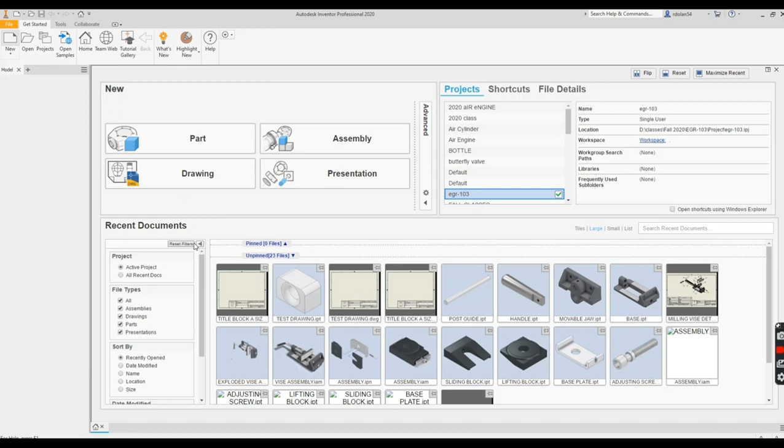We're going to take a look at drawing the exercise files from this chapter. So that is on your PDF, and I'm going to start new, of course, and this is in inches, so make sure I'm in English and standard, and I'll pick create.

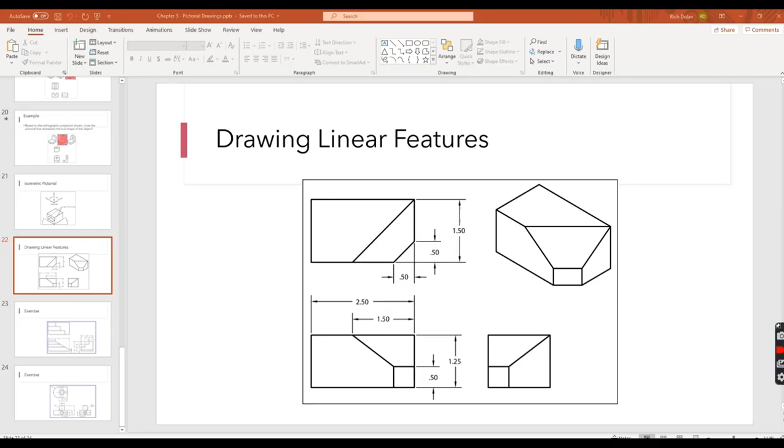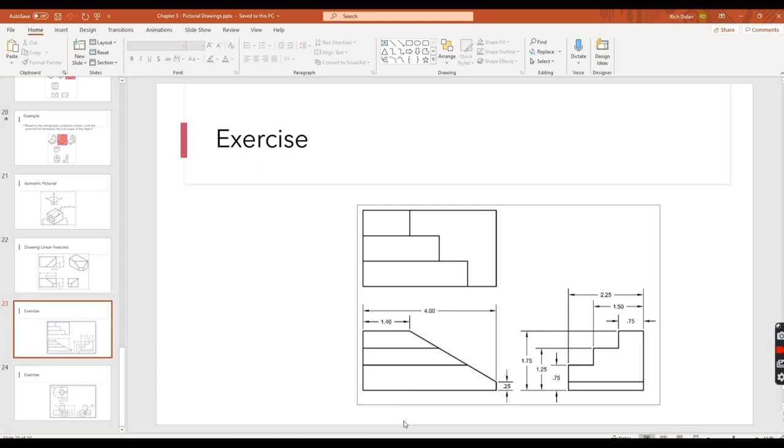Now the drawing that we're going to be looking at is this one right here. Okay, so I have to decide where I'm going to start drawing. I think the best way to start this, I'm going to start here and draw the right hand side first. Okay, so that's the first one I'm going to draw. So I'm going to go in here to new sketch, and I'm going to go to the right hand side, which is the YZ plane.

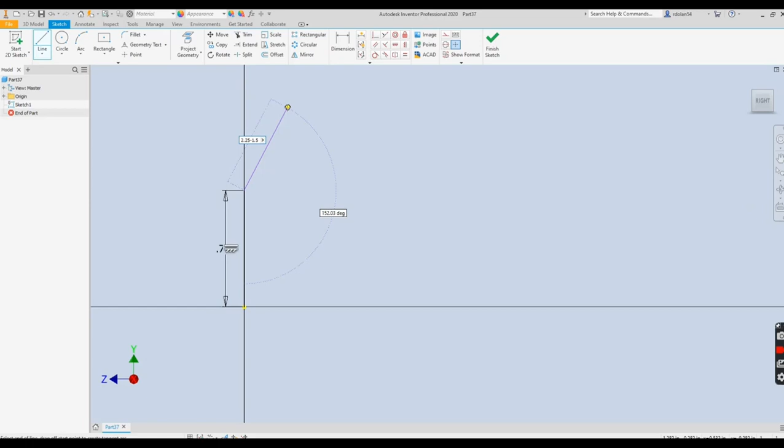Okay, alright, I'm going to start drawing my steps there. I'm going to start at the origin. I'm going to go straight up, and I'm going to go 0.75. And then I'm going to go back. Now that is 2.25 minus 1.5. So I'm going to type that in. 2.25 minus 1.5. Okay, now I got to make sure that my line is straight. Mine was crooked there, so try this again. 2.25 minus 1.5 gives me that line there.

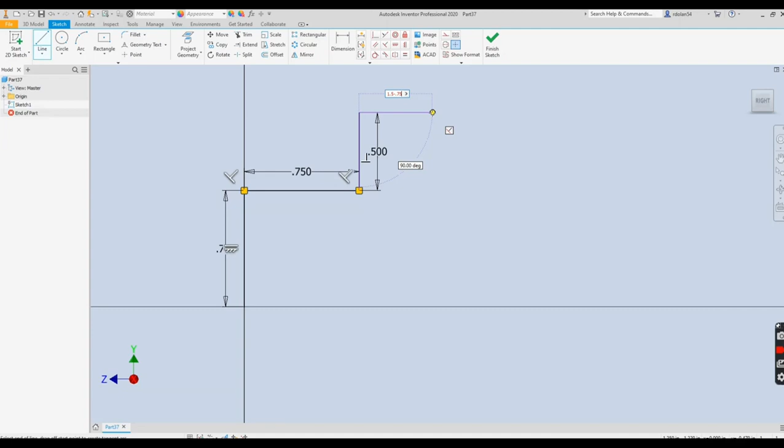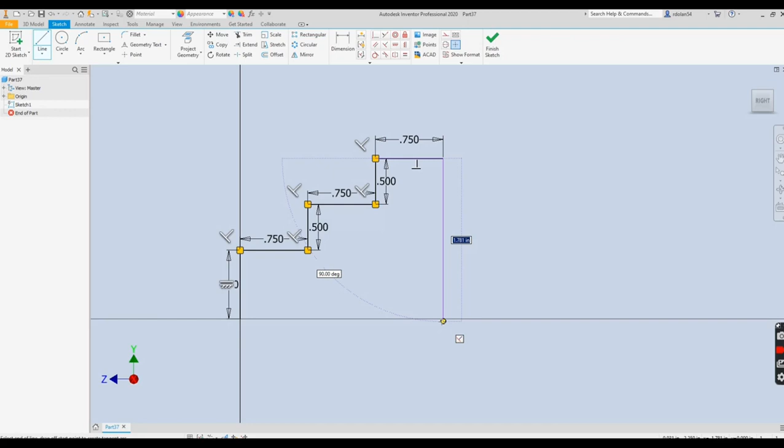I'm going to go straight up again, and I'm going to go, we got 1.25 minus 0.75. I'm going to go back this way, and that is going to be 1.5 minus 0.75. And I'm going to go straight up, and that is going to be 1.75 minus 1.25. Okay, I'm going to go back this way, and that is 0.75. Come straight down 90 degrees till I get to this point. If I want, I can make sure I get that line right there. Make sure I'm 90 degrees right there, and bring it right to this edge right here.

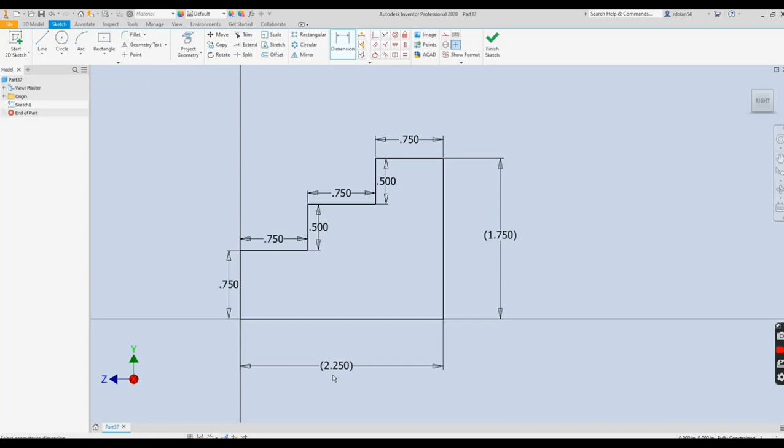Okay, I want to check some of my dimensions, so I go here. That is 1.75. If I go to do that, it will say it's going to over constrain it. So I can say accept. Okay, and what it's going to do is just put that there as a reference so I know that I'm doing the right thing. Okay, I can also do the same thing here, and that is 2.25, and I'll accept that. Okay, these dimensions won't hurt anything, just won't be used.

And I'll pick finish. Now what I want to do is now I want to extrude it. Okay, and I'm going to extrude that. Pick extrude, and I'm going to go 4 inches. Okay, so I have my right hand side done.

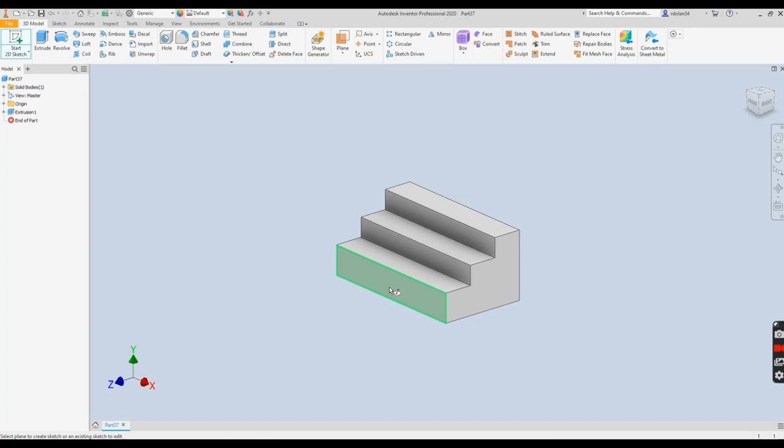Okay, so now we're going to go to the front view, and if I again look at the drawing, here is the front view. So what I need to do is I need to go over 1.4, 0.25, connect the two. Alright, so I'm going to start a new sketch. I'm going to start on the front view. Okay, and I'm going to draw a line from this endpoint over here, which is 1.4. And I hit enter. I draw a line here that goes up 0.25, and I'll connect the two of them.

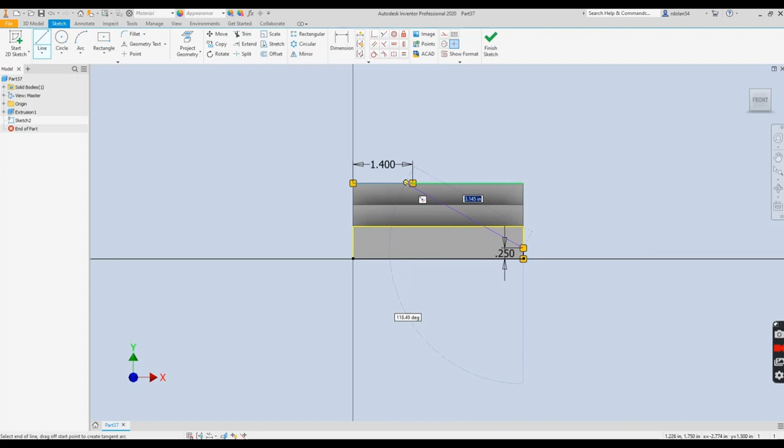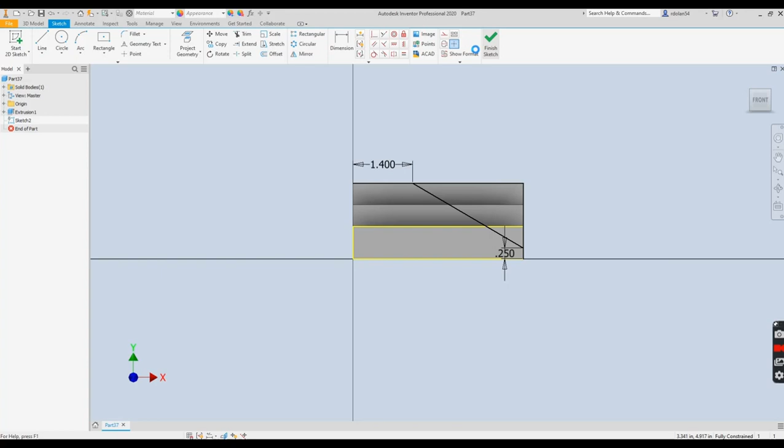Okay, now I'm not going to extrude this part. This is the part that's going to be left. I'm going to extrude this part here, so I need to finish those lines. So I'm going to go here to here to here and pick OK. Alright, I'm going to finish my sketch. Okay, so now you see I have this spot here that I'm going to extrude.

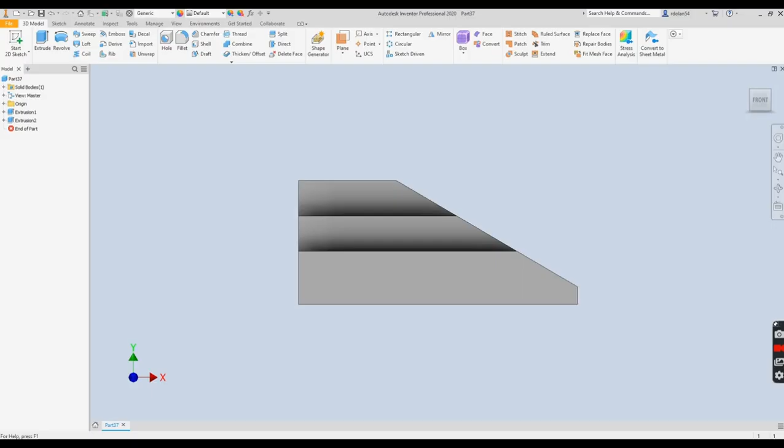I'm going to pick extrude. I'm going to pick here. Now notice it didn't pick this bottom part, so I have to pick that as well. I want to cut it, and I want to cut it all the way through. And I'm going to pick OK, and now I have my views. If I take a look at my front view, okay, that looks exactly right there. Here's my top view, which will look like that. Looks pretty good. And then my right side view will look like this. Okay, so it all looks pretty good.

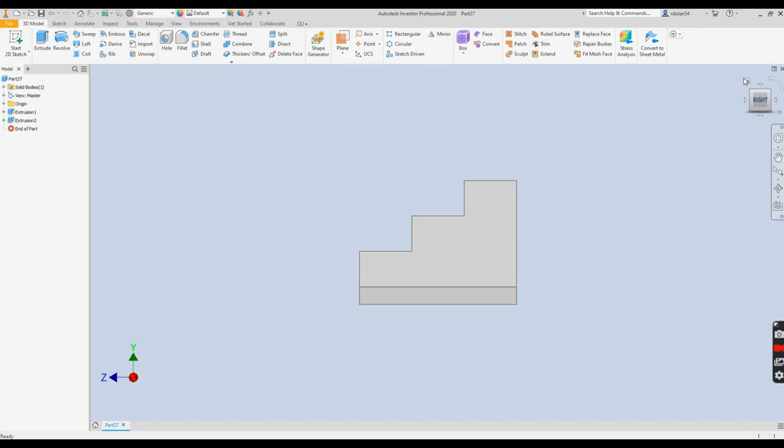Okay, I'm going to go back to my isometric view, and I'm going to save this. I'm going to File, Save As. I want to look where I want to put it, and I'm just going to call this Example 1.

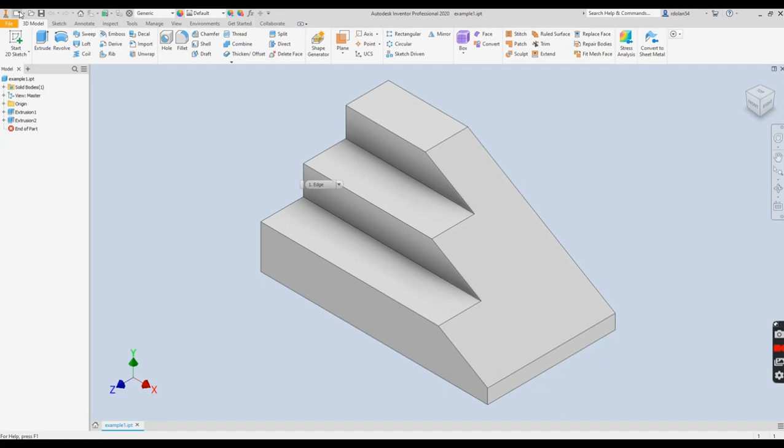Okay, now what I want to do is I want to slap it on a piece of paper. Alright, so I'm going to open up the templates that we made before. So I'm going to open, and this is an A size inches. I'm going to pick open. Okay, so here is my A size inches.

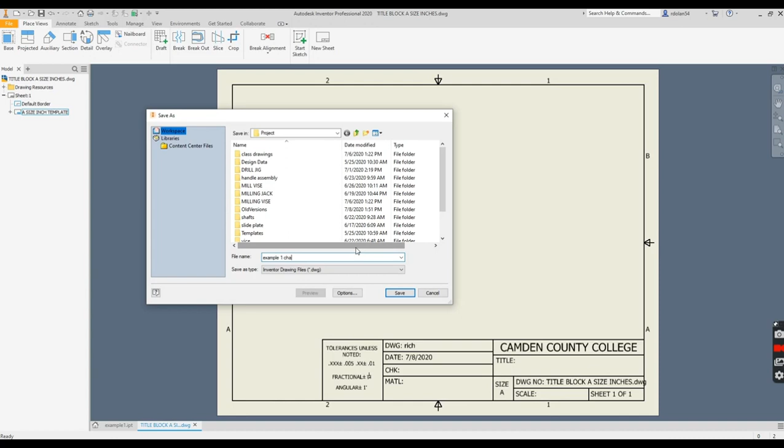Now what I want to do first is I want to go File, Save As. Okay, and I want to do this right away, and I'm going to call this Example 1 Chapter 3, so I can remember where it's at. I'm going to pick Save.

Okay, now when we go to put a drawing on a piece of paper, again, you'll notice that we have a different setup up here because we are in a drawing instead of a part. So I'm going to pick base, and the base is going to pick where we want to start. It's always going to start with what it thinks is the front view. If it's not the part I want, I can go here to open existing drawings and find it, but this is the one we want.

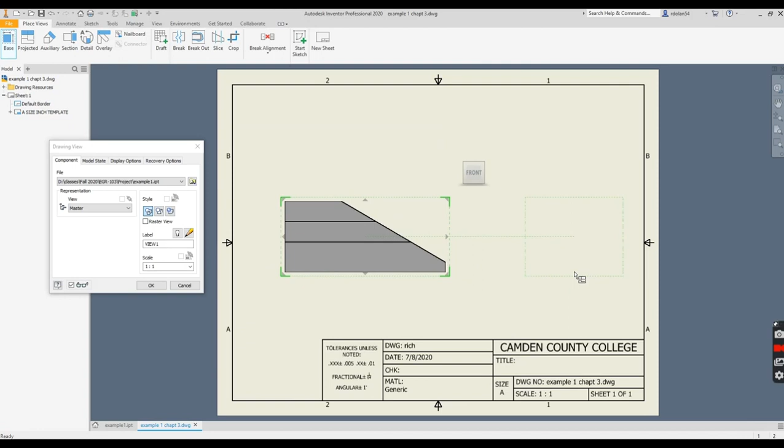I can slide it over here. Now to make the right side view, all I do is drag it over here to this side. Drag it up here to that side. I'm going to have to move them around a little bit. So I can move this down, and then move that up a little bit. And all I do is pick OK. Alright, so now I have my drawing there.

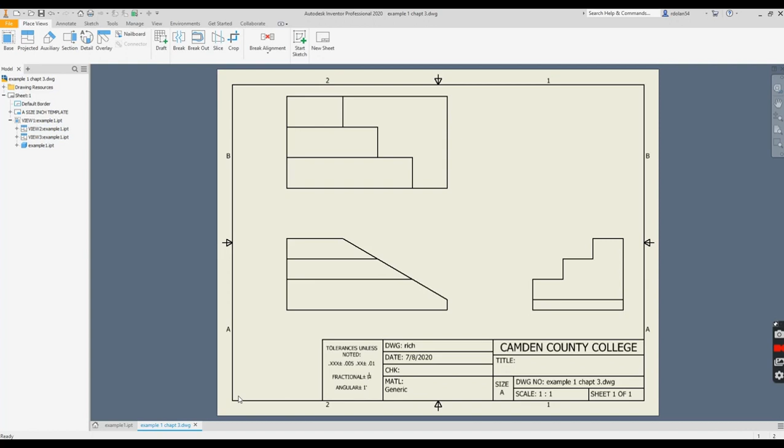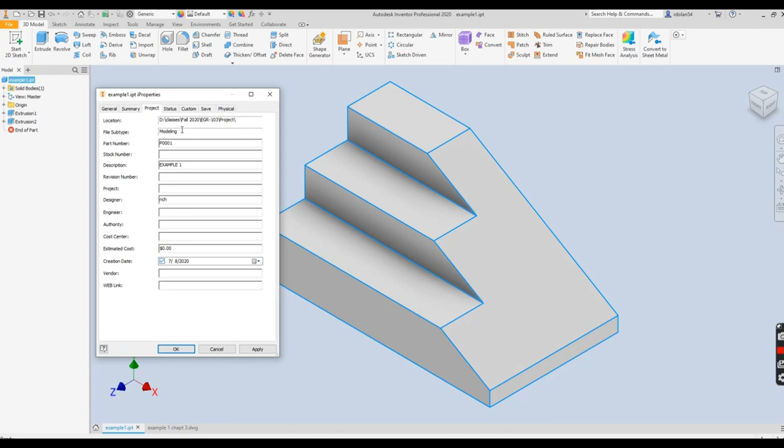In order to fill in the block, I need to fix some of the stuff here. So I'm going to go to iProperties, the summary, and this is called Example 1. I'm going to put my caps lock on. Make sure that I put my caps lock on. Now I can put my title, Example 1. Make sure my name is right there. The project, if I had a part number, P0001, whatever it is, description, Example 1. I can put any of this other information that I want, but that's all I want.

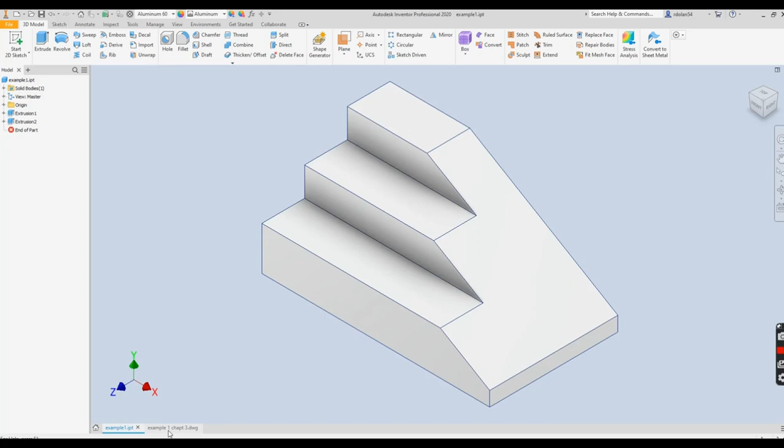So I'm going to go to physical, and let's say that this is aluminum. So make it 6061 aluminum, and we'll pick OK. You notice that the color has changed because it's going to pick the color of aluminum. And I'll save that. Go back to my drawing. Now notice my name's not fixed. The date is right, the aluminum. The title and the drawing number are okay, so I need to go up here to

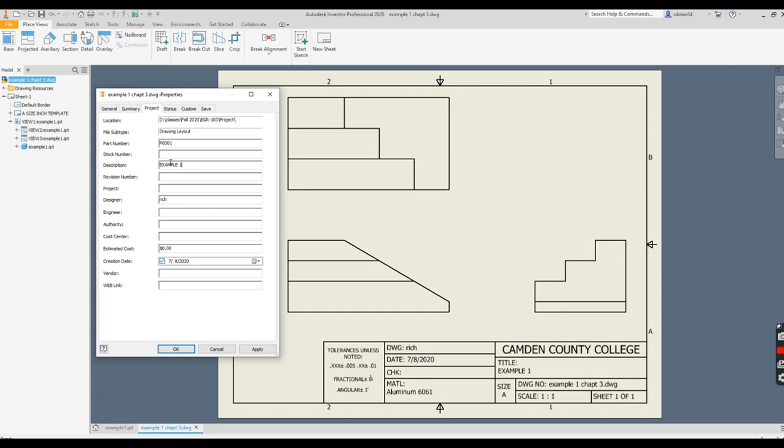iProperties. Summary, the title's okay, but I can put it here if I want. Example 1. The author, this time I'm going to change it to me. All this is okay. I can change this to what it is, part 0001, description, Example 1. Everything else should be okay. And I pick OK. Now I have my drawing. I have my 3 views.

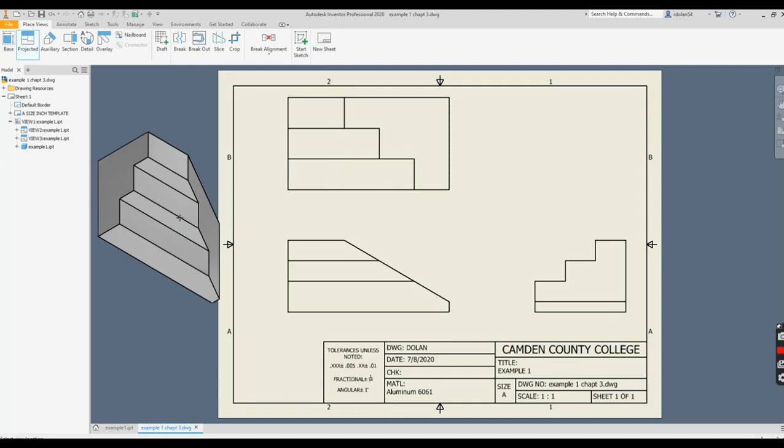Now I want to make sure that I have an isometric view. What I can do is go up here and pick projected. Now I can pick whatever view I want. So if I pick this one, I can make that isometric view anywhere I want. If I go in here, pick this one, a little strange one, but I can pick those. If I wanted this one, I could pick these. So depending on which view I want to look at. I kind of like this one. That shows it nice. And I'm just going to slap that right there, and I'll pick Create.

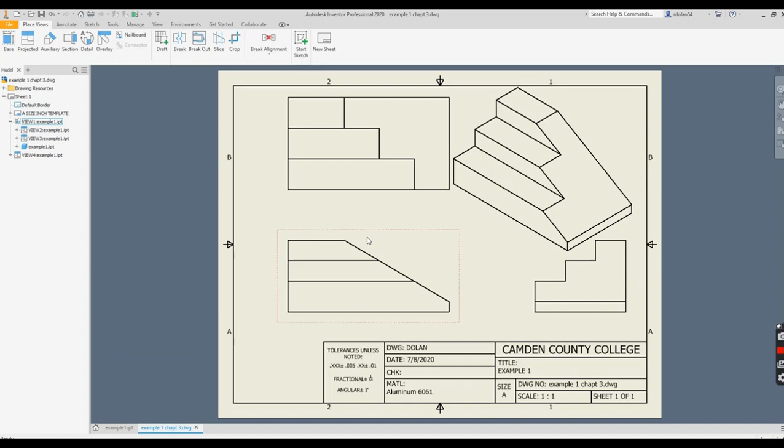Excuse me. Now one thing, I'm going to move these out of the way a little bit. Maybe just a little bit down. Notice that this view, when I move it down, this one moves with it. When I move it over, this one moves with it. So that's not so bad. Now, if I were putting dimensions on, that would not be great, but it'll be okay.

Now, if I double click on this, I get my drawing view. Here we'll see the style. Now I can put hidden lines in there if I want. So if I go here where it says style, hidden lines, pick OK and you'll see any hidden lines. Now it's not normal for us to put hidden lines in an isometric. I can also pick right here, that's what the default was, no hidden lines, and then I go here and that's shaded. Now, I kind of like shaded. Of course I didn't pick it, but it kind of looks nice shaded.

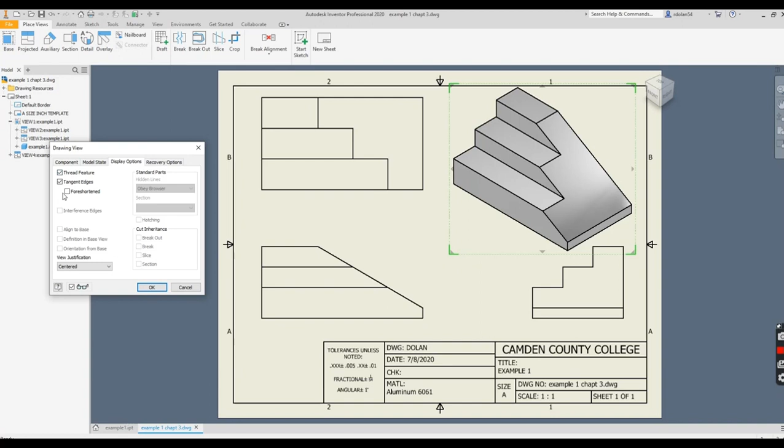Also on there, I have things like display options if I'm showing any threads, and tangent lines and things like that. Model state we don't have to worry about, and I can just pick OK. Now I would just save this. Again, make sure that you've renamed it from your template file, and I pick save. And that is our first example.

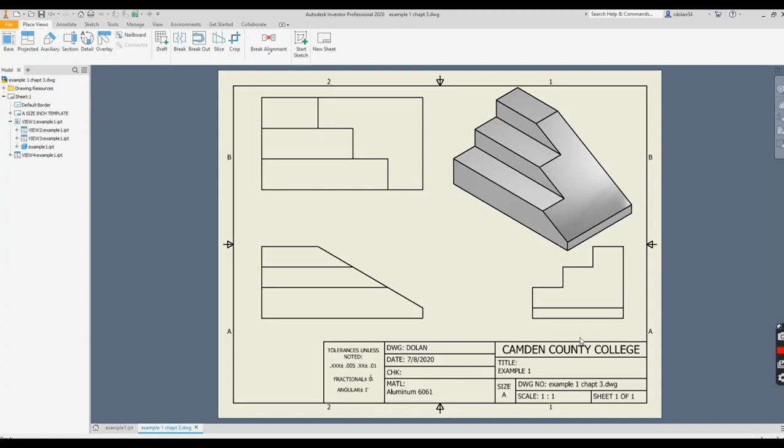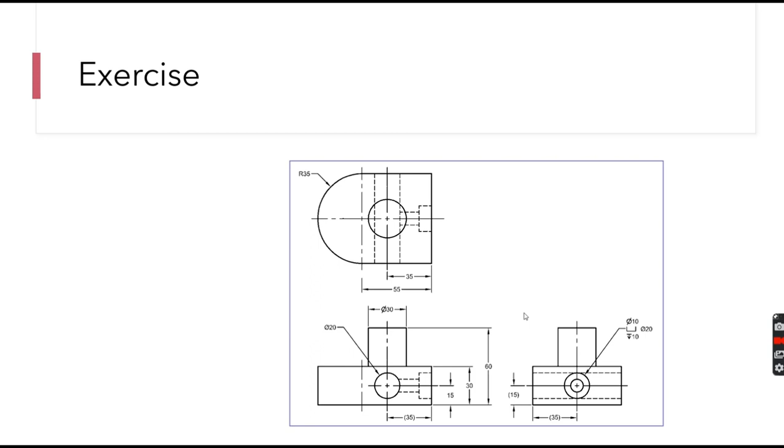Let's take a look at our second example. Here it is. I'm going to draw this one. Again, I'm going to start looking at what I want to draw first. Since I have this radius here, I'll probably start with the top view. Another thing I want you to know is that this is 35, 55; unless it's a really big piece in inches, this more than likely is a millimeter drawing. So let's go back to here, and we're going to pick open, and this time I'm going to pick my millimeter title block.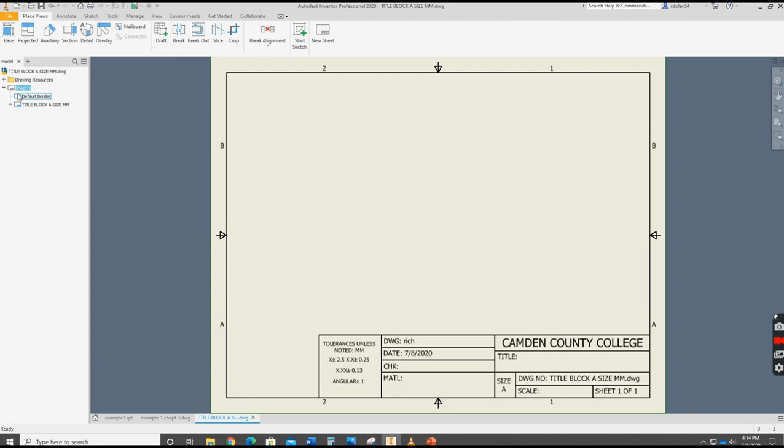Okay. Now for some reason, and this might happen to you, it's not showing up there, and I'm going to go here and zoom all so it shows up. It's fine. Alright, now I'm going to make this a B-size drawing, just because I want to. So I'm going to right click on sheet, go to edit sheet, make this a B-size, and I pick OK. So that's where I'm going to put it.

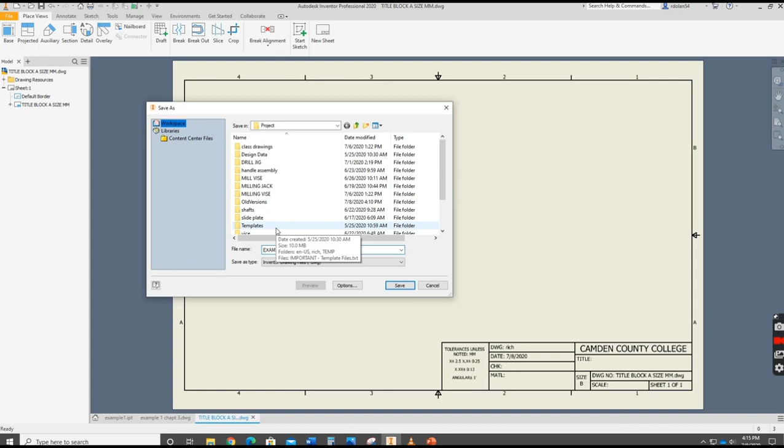I'm going to go to file, save as, and this is going to be example 2 chapter 3. Okay, now I do need to draw the drawing first, so I'm going to go to, that's why that does that, it's my mouse. Okay, I'm going to go to open, nope, I'm going to cancel that. I'm going to go to new. I'm going to go to metric, and I'm going to make this a standard millimeter drawing.

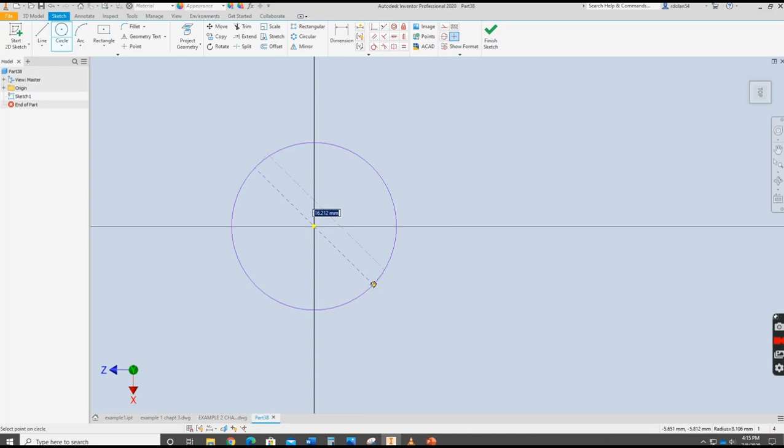Okay, again I'm going to start the sketch, and I said I want to start at the top view. So I'm going to start by drawing a circle. I'll put it at the origin, and notice that it is 35 millimeters, and that's the radius. So I can either type in 35 times, whoops. Okay, so now I got 335. I'm going to go to dimension. I'm going to double click on that. I'm going to change this to 35 times 2. Just in case that happens to you sometimes. So you'll see it's 70.

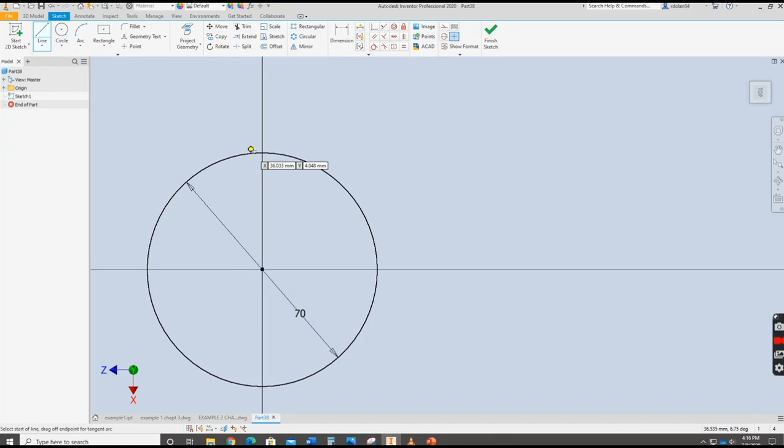Alright, so now you'll see that from here I'll draw a line. Right there, and you'll feel it kind of snap there. And I will draw there, and notice it is tangent. And from that center to there is 55. I'll go down to here, find the tangent line to that. Right there, you'll see that little dotted line. Come over to here. I'm going to pick OK.

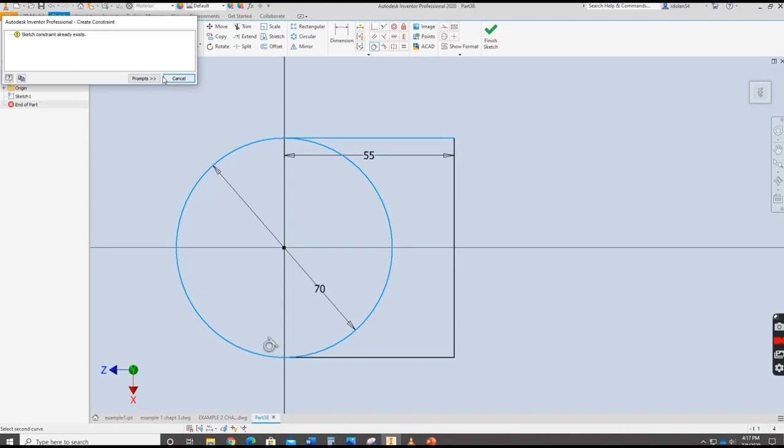Now I want to make sure that that is tangent. I'm going to go tangent here and make sure this line and that line is tangent. Let's try that again. I'm going to make sure that this line and that one is tangent, and this line and that line is tangent. That one already was tangent. We saw that before, so I don't need to put that there. Okay, I'm going to trim this guy up here. Alright, now I'm going to leave that hole, or no I'm not.

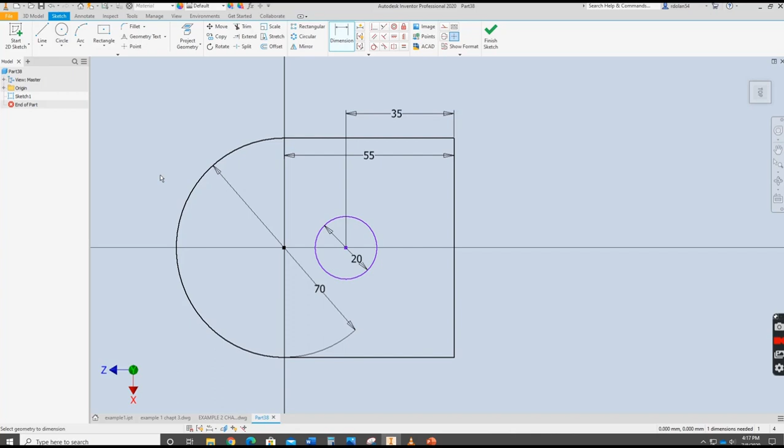I'm going to put that circle here. Now, you'll notice it's not on this center, so I'm just going to move it over to here, somewhere, and I'm going to go up, and that is 20 diameter, so I'm going to type in 20. I'm going to dimension from this spot to here, and that is going to be 35. Okay, now what I wanted to show you, I'm going to finish the sketch.

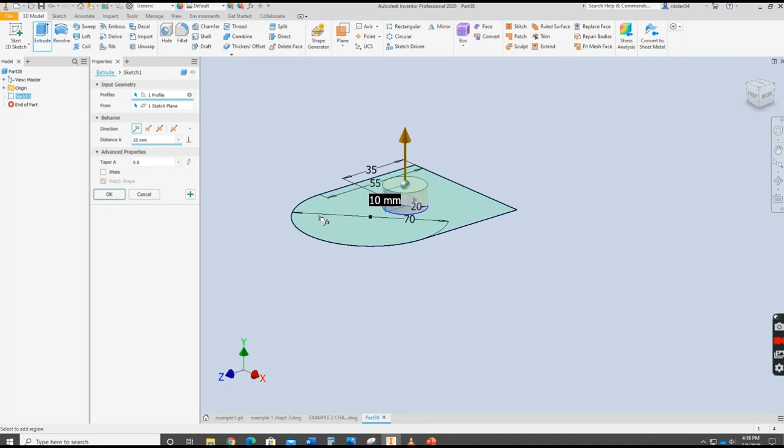Okay, now if I go to extrude this, I can extrude that, and that puts a hole in it. I don't want that, so I'm going to undo that one. Now if I pick this one, well, unfortunately I cannot extrude both of these. So I'm just going to have to extrude that part. If you notice, I paused there a minute. I was not going to draw that circle, but I'm going to show you that you have to create a new sketch to do that.

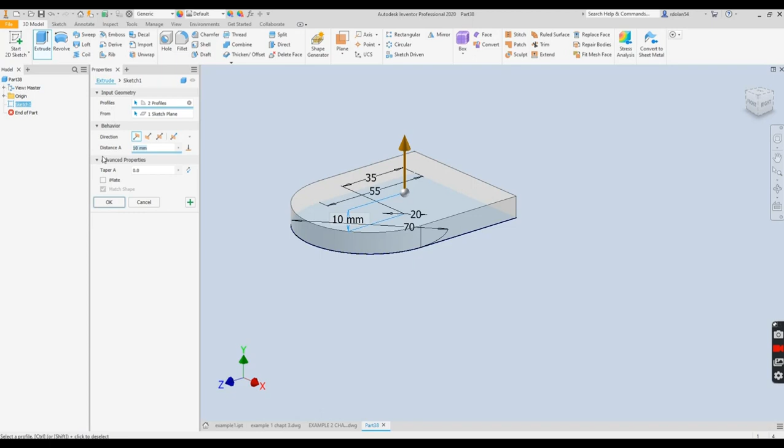Okay, so I had a hard time remembering when I first started drawing in Inventor that if you're extruding things at different depth or height, you have to put them on a different sketch. Okay, so here I'm going to do this one, and this was, what is it, 30. I'm going to type in 30, pick OK.

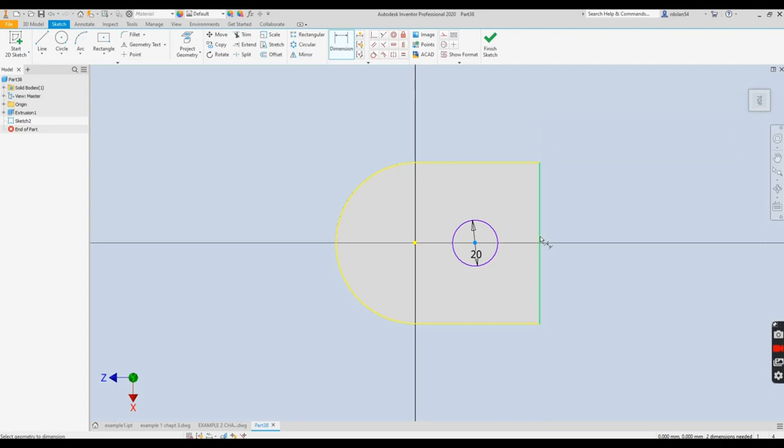Now I can put that boss sticking up there, so I'll go to new sketch, and I need to put it here. Okay, I'll do what I did before. I'll just put a circle here, and I'm going to put this at 20. Then I'll dimension this from here to here, and that is 35. And then I'll finish the sketch. Now I can extrude that.

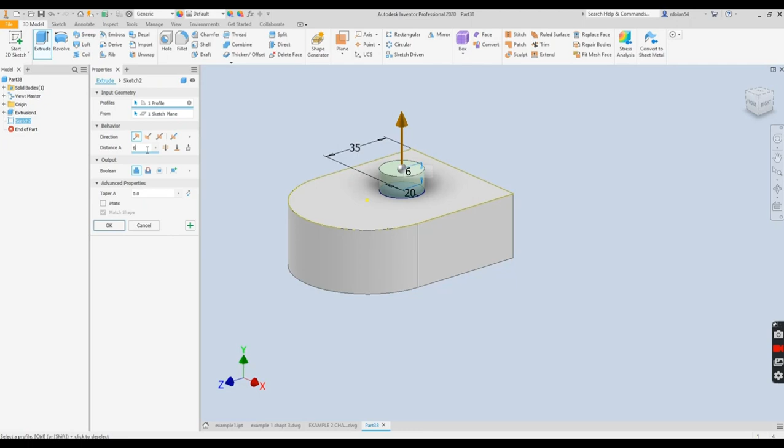I'll pick this one again. If I pick the wrong spot, that's not what I want, I can go here and clear the selection, click there. Now I want to see how far that is. Okay, now that is, according to the drawing, 60 from the bottom. And the thickness of that bottom part is 30, so if I go 60 minus 30, it's kind of a nice feature that you can do any kind of math when it's asking for a distance.

You can use brackets, you can use multiply, divide. Okay, it's pretty handy. I'm going to pick OK.

So now I have this. Now what I have to do is I have a hole to put in the back here and a hole to put on the side.

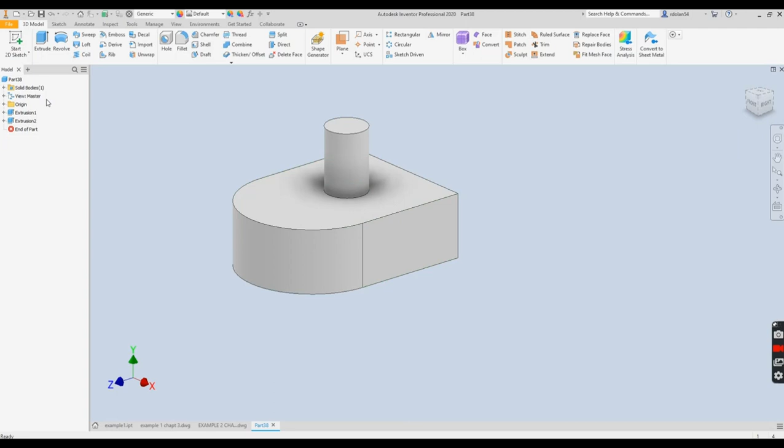Okay, for example, let's say for this hole on this side. I'm going to create a new sketch and put it on that surface. I'm going to draw a circle, pick a spot, and that circle is 20. I just noticed a problem with that boss sticking up there. I made that 20 because I read the wrong dimension.

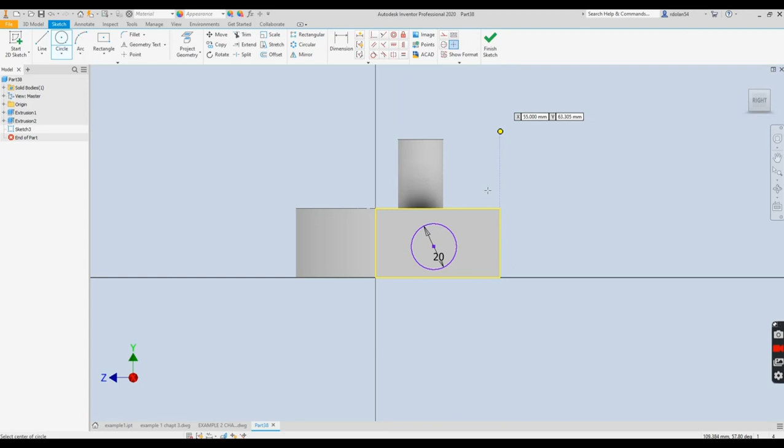It should be 30, so we're going to look at how to fix that in a minute. Now I want to go to dimension, and from here to here is 15, and from here to that center line is 35. So now I can finish the sketch.

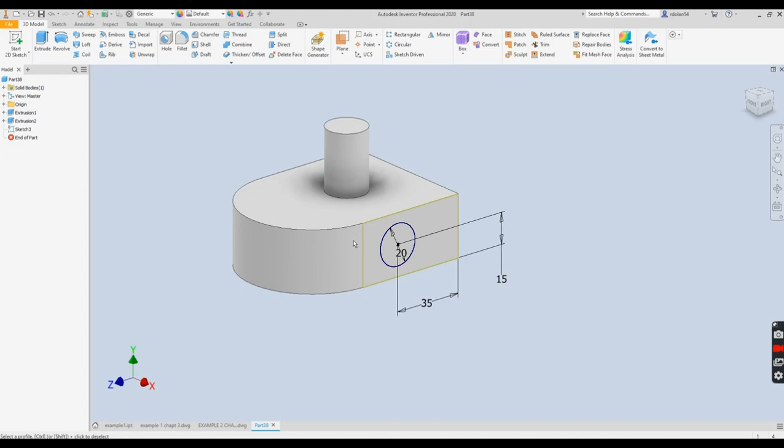I can extrude that through. I want to cut it because it's a hole and I want to go all the way through, and I'll pick OK. Now again, I said that I drew this the wrong size.

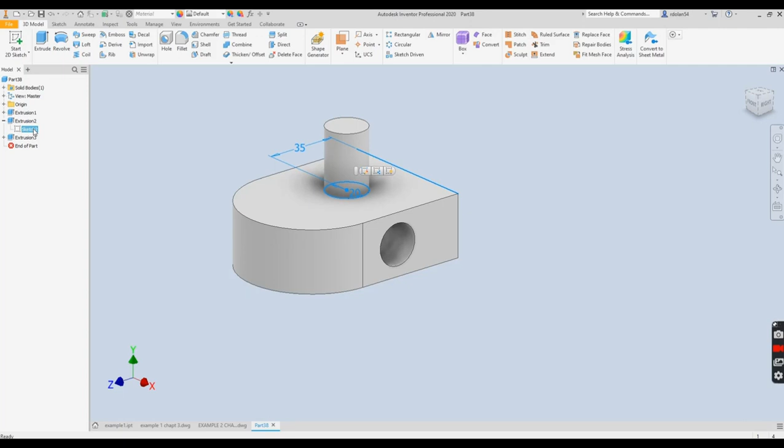So what I have to do is find out where I did that. That was under extrusion 2. If I open extrusion 2, here is the sketch that I made. I'm going to right click on it and pick edit sketch.

I'm going to double click on 20 there, and I'm going to change that to 30. Then I pick finish sketch, and our drawing has been fixed as if by magic.

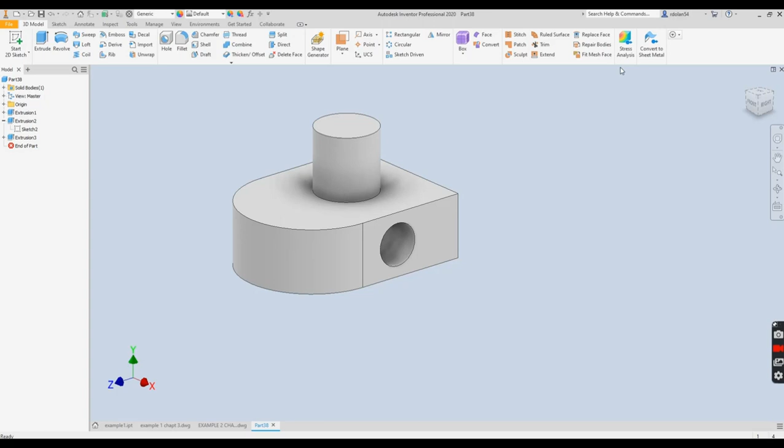Really nice feature. Now I want to put a counter bore in there, on the back side here. So what I want to do is hold my shift button down, then hold my mouse button in the middle down, and while I'm holding both of them, I can bring this around this way.

Okay, and then if I wanted to, I could make a new sketch here, but we're going to use the hole command.

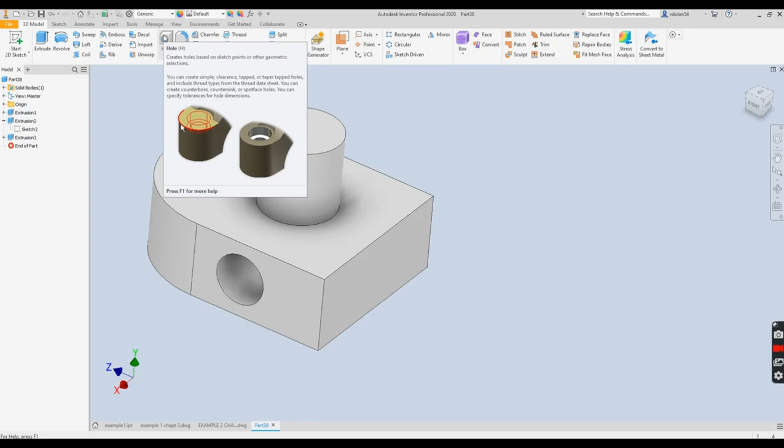Now the nice thing about the hole command is it lets us do things like countersinks and counterbores and threads. It's really, really, really nice, and we can do that while we're in our 3D view.

So I need to be able to see this face right here. If I want to swing that around a little bit, I can do like before and hold the shift button down, or I can come over here to the orbit command and just make it so I can see it pretty nice. Right click and pick OK.

I'm going to go to hole. When I go to hole, I'll get this, and you'll see that I have different holes, and we'll talk about that in a second. I want to know where I want to put the hole.

Now it doesn't matter. If I put it here, it will automatically put it in the right direction. If I put here, notice it will do it in that direction. So I want it here.

Now the thing is, I want to make it in the right place. It's a little tricky to remember how to do this. So I want to go from this edge, so I just click on this edge and I'll put a dimension there.

Right now that's 37.613. I'm going to change that to 35. Now don't hit enter. That's the tricky part. If you hit enter, you're going to start a new hole.

So then I'm going to come here, and from the bottom, that dimension is 15. Again, do not hit enter. So now here is the type of hole.

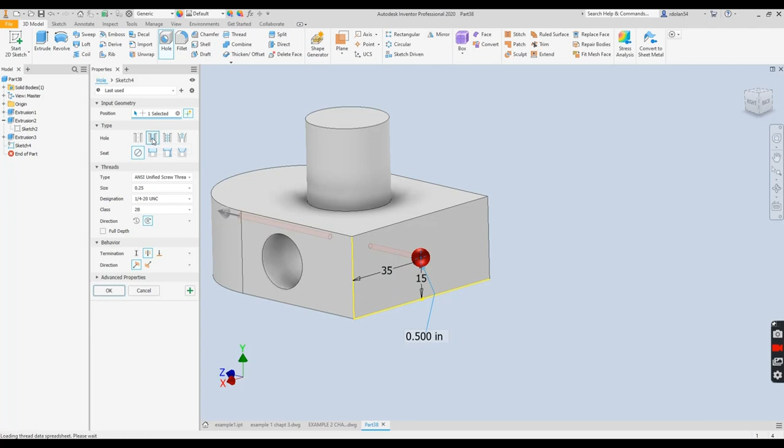I have a simple hole, which is just the hole we're going to use here. Now I have a clearance hole. If I pick clearance hole, it wants to know what kind of screw do I want. So if I were using a flathead machine screw that was a number 10, it would automatically put that in there. Now of course I would pick ISO, and that's an M2, so that would be that.

Or if I wanted a thread, I can pick whatever thread I want. If I wanted a tapered hole, this is a countersink, I can do that. Now this is just a plain hole, so I'm going to go through there.

Now I have different options. I can go a distance, how deep I want it. I can go in the direction that I want to go to. I can go whether it's going to have a flat or a pointed end. Most of the time when you drill a hole, it's going to have a pointed end here, from the drill bit. We'll talk about that when we get there.

Okay, but what I really want to do here is make a simple hole, but with a counter bore. You'll see there's two lines - that is called a counter bore. It's so we can put a screw or a bolt in there so the head doesn't stick up. Now I need the dimensions of it.

Now if you notice on our drawing, it says 10 diameter, and it says 20 with a weird sign, and then it has a down arrow with 10. What that means is this little hole here has a diameter of 10, so I'm going to make that 10 millimeters.

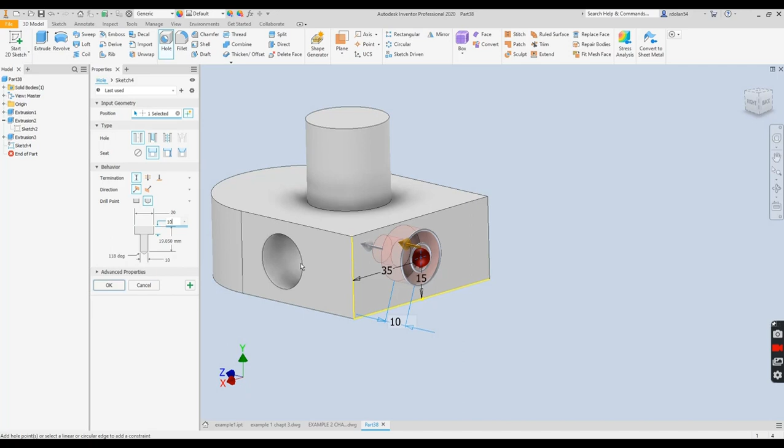Now it wants to know where I want to do it. Well, I'm coming right to this hole. I'm going to hold my shift button down and go this way a little bit, here, and that allows me to go to a surface or a feature. So I'm going to go to this hole. Now it looks like it's going to go through to the other side, but it won't.

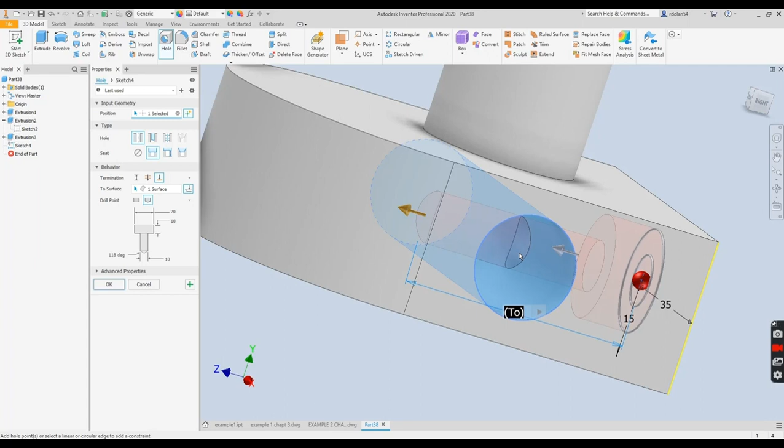Now I'm going to make sure I got what I want. The counter bore is 20, 10 deep, 10. Now it doesn't matter what I make here as the end point because it's going to go right to here, so it's going through there, and I won't see that. I'm going to pick OK. Now again, if I shift this around, you'll see that now I have a counter bore that goes through to that center spot there.

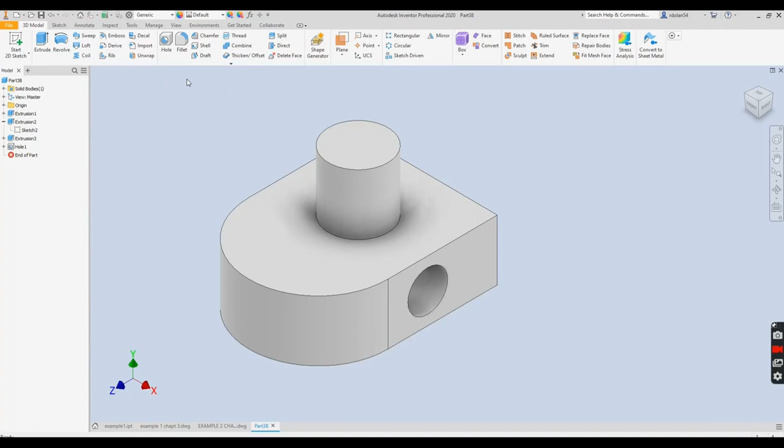Now I have my drawing, or my part. Now what we're going to do is put that part on a piece of paper. Before I do that, I've got to do a couple of different things. One thing is I want to go up here to our properties. In our summary, this is example 2.

Again, I can put Camden County College, but it's already there. Project, part number, I don't know, part 0002. Description is example 2. And physical, let's make this, I don't know, we'll make it stainless steel.

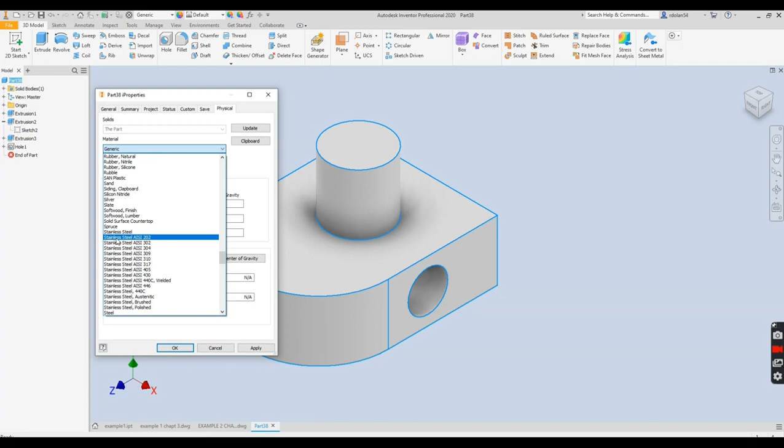So I'm just going to pick stainless steel right here. I don't know what class I want to use, so I'm just going to pick stainless steel. Pick OK. Now as you can see, it's shiny. And now I'm going to save.

I'm going to file, save. Okay, and this is example 2, chapter 3.

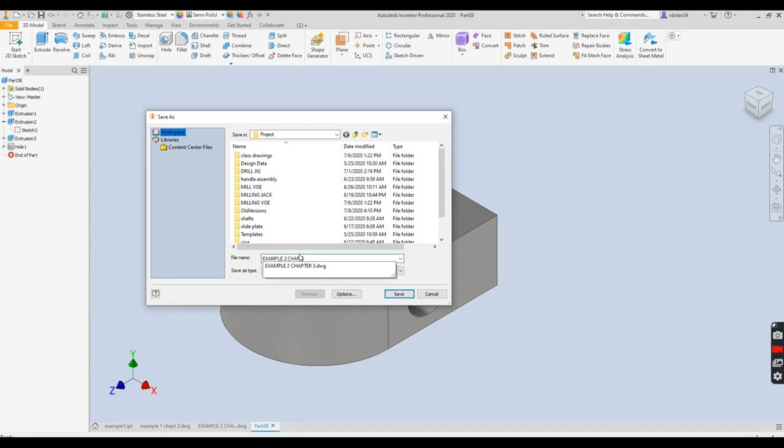I'm going to go over here to the drawing that we had set up already. I'm going to go to base now. It will automatically use what I used before. Here I can set the scale, so if I wanted this, that's probably too big. That's too small.

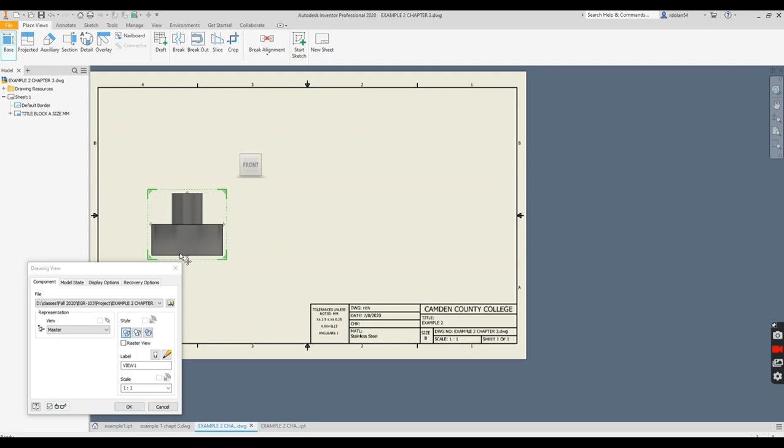1:1 is just right. So I'm going to take and slide this over when I get the 2 arrows there. Probably want to bring it down a little bit, maybe there. Go over here, put the side view.

Here's the top view. I may want to fix that a little bit, so I don't want this view. Now you'll notice that I get an X here - I don't want that view, I don't want that view. I want to change this one.

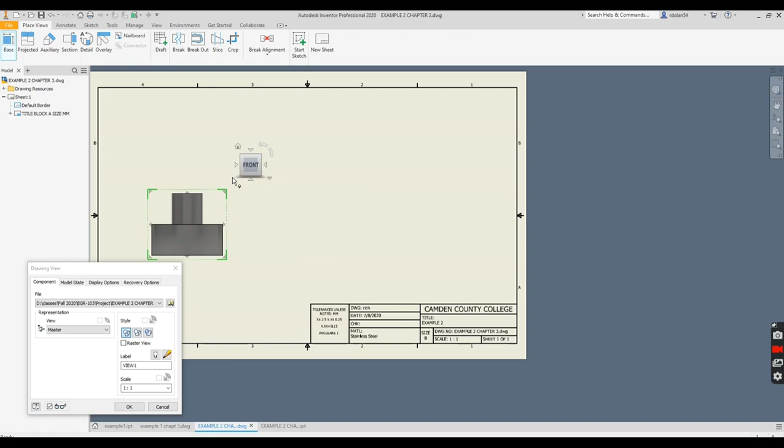So I go up here and I can move it around - if I want the top view, bottom view, left, right, whatever I want. Now what I want is, in our example, it's kind of sitting like this. So I'm going to take a look, and now my top view is going to be there, which is probably better, and my right side view, so I can see that hole, is going to be there.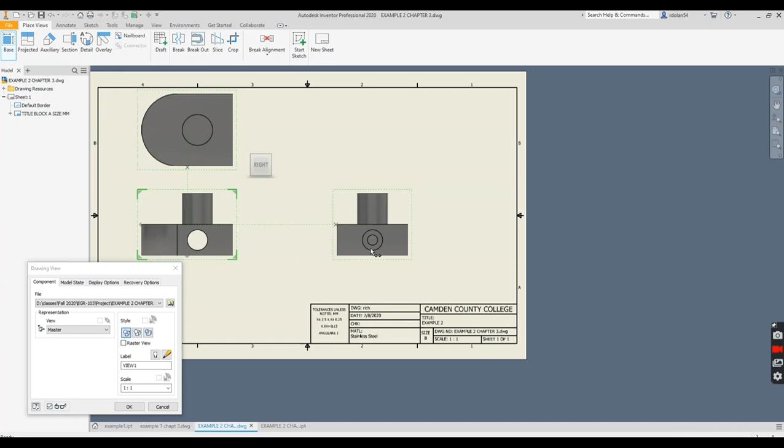And if I know I want to take my isometric from here, I could slap it right there, move it how I want. Pick OK. Alright, now I have my 3 views. Again, I like to shade the top one.

Also I don't like this line right here. I think I can go here to display options and take off tangent edges, and there, that line goes away because it really shouldn't show.

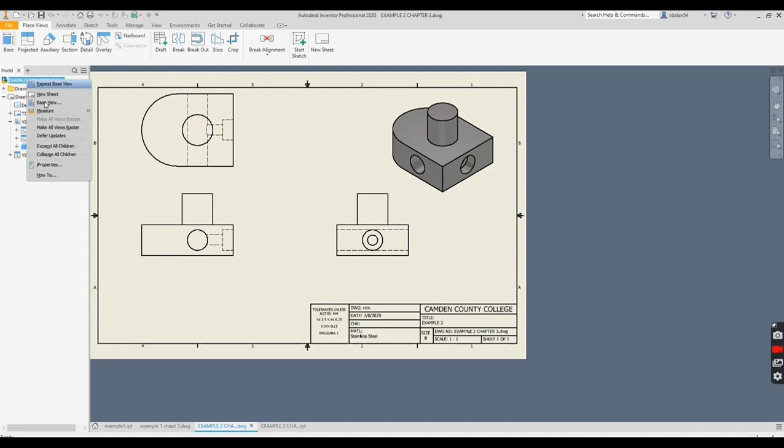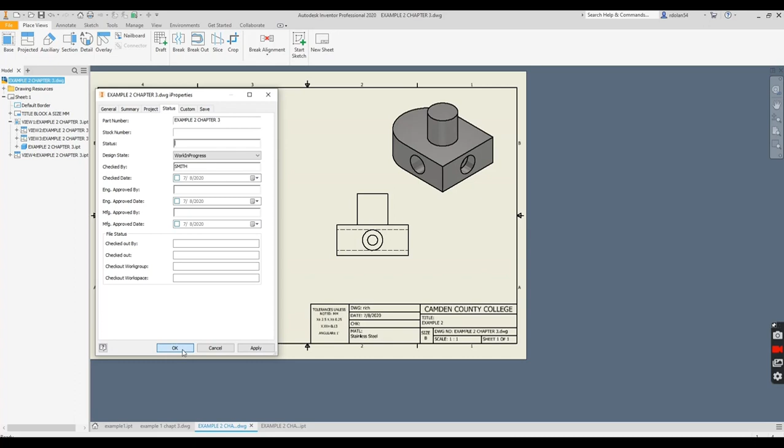All I need to do here now is go into properties. The title's okay, everything's all right there. Under project, everything is okay there. Under status, I want to put checked by - I'm going to put Smith. Anything else? I think that is it. We pick OK.

Okay, and now we have our drawing. We have our views. And that is it.